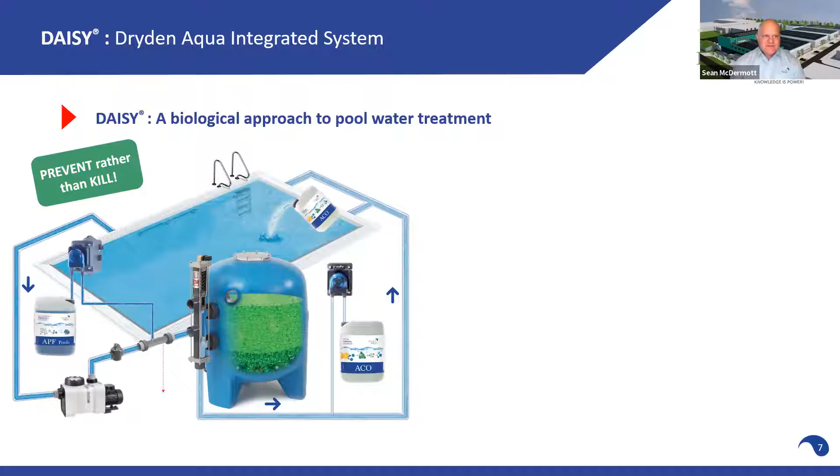And Sean is going to take us through this. I think I have to drive the presentation, right, Sean? Sure, no problem at all. So yeah, Daisy, Dryden Aqua Integrated System.

This differs a lot from the normal course of action in the US, which is to use large amounts of chemicals in the water to try to annihilate any pathogens that are brought in. What we want to do is prevent their ability to propagate, to grow in the pool, in a way that produces the least amount of harmful disinfectant byproducts.

So step one, of course, with Daisy is our filter media, activated filter media, AFM. It improves the filtration, of course, but it also eliminates the breeding ground on which bacteria and pathogens can grow and multiply. That's biofilm. We eliminate biofilm growth in the filter.

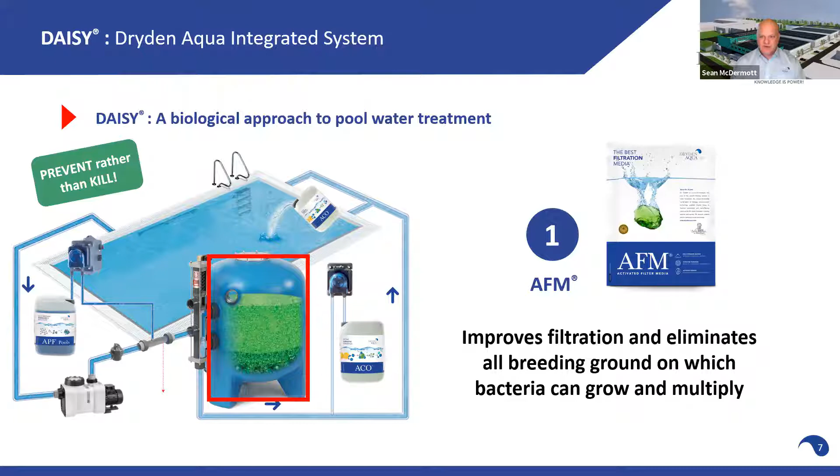Step two is APF, which is a multi-spectrum coagulant and flocculant. It's the only one in the industry. And what this allows us to do is to pull things out of the water, out of solution or suspension, that filtration normally won't be able to pull out. Beyond that, we're also removing all of the nutrients that bacteria and algae need to grow in the pool. So it's 5 different active ingredients, and it's a multi-step process.

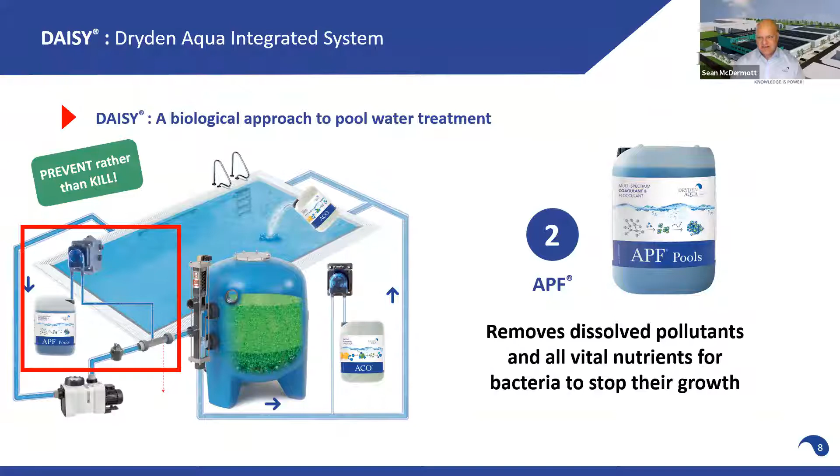And finally, for outdoor pools and pools with UV systems, we have ACO, which protects chlorine from the sun, but not like cyanuric acid does. This is a replacement for cyanuric acid. So the first step is we protect the chlorine from UV light. The second step is that reaction is a catalyst for producing additional oxidants in the water.

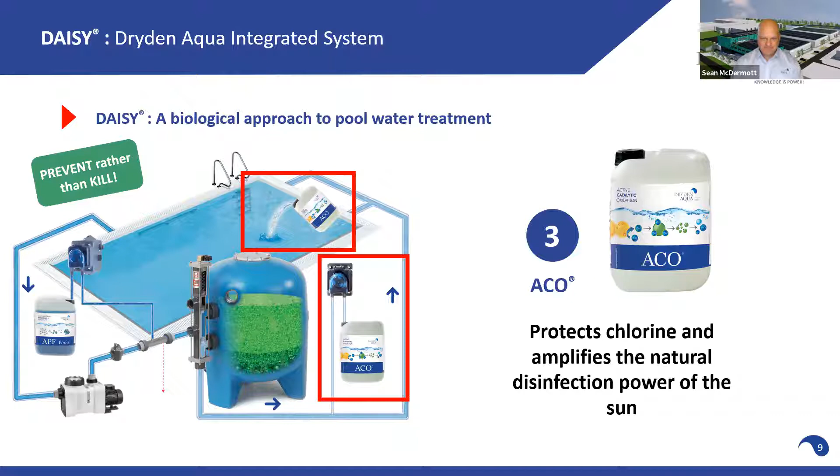Summary: this can be used with all types of pool water treatment, and the results are the absolute best filtration available in the industry, possibly down to 0.1 microns when you use proper filters and flow rates. Oxidation demand is therefore reduced by up to 80%.

Your chlorine is going to have a much easier job of disinfecting the pool. If we're using less chlorine, of course, we're going to produce less of the toxic disinfection byproducts that chlorine produces, such as trichloramines and trihalomethanes like chloroform.

And to summarize what we stand for as a company: the safest and clearest water possible, the best air quality for indoor pools, and the lowest possible chemical consumption and operating costs. So you spend a little bit more upfront on the Daisy system and properly sized filters, and in the long run, you save yourself a lot of time, money, and headache.

Well done. Good. Very good. Thank you, Sean.

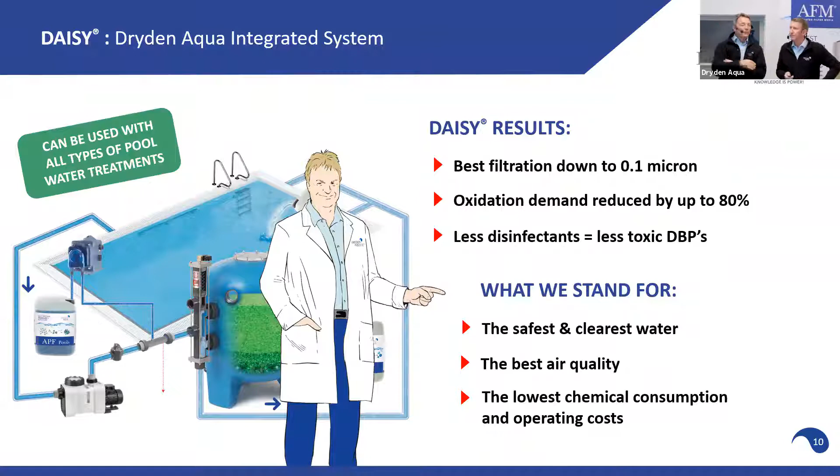I don't know about the US, but you see it very often in Africa, you see it in Asia: very small filters. But then in the pool, to compensate for it, high levels of chlorine, 3 ppm, 5 ppm, where we can run our system with 0.2 ppm. So we don't want this situation, we want to have a different one. And part of the reason why we see this is because of this here.

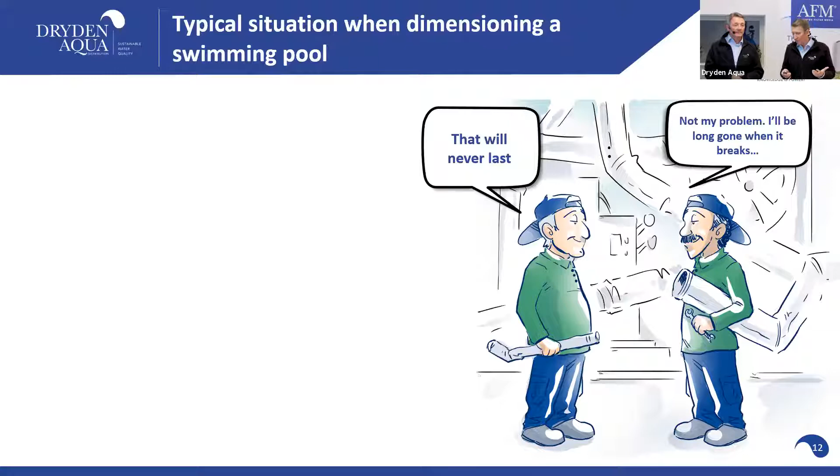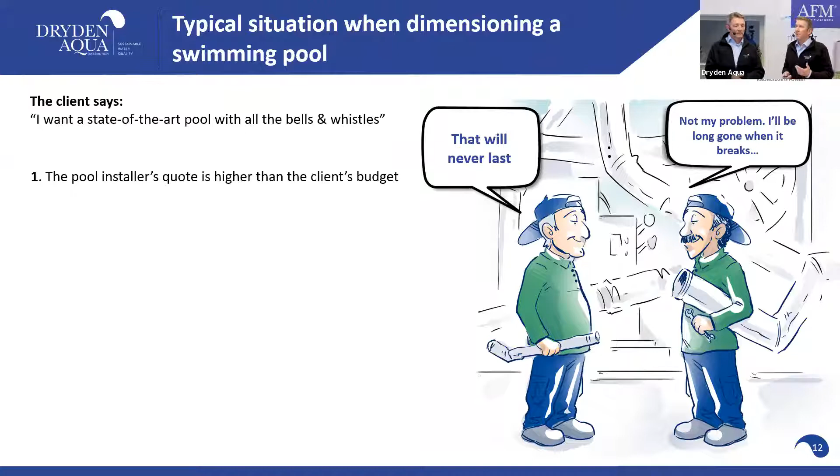A pool owner wants a state-of-the-art pool with all the bells and whistles. The pool builder makes a quote. The client comes back and says this is way over budget, and asks for savings. So what does the installer do? He compromises and cuts corners: he reduces pipe size, reduces filter sizes, buys cheaper pumps, and doesn't use AFM but a cheaper media instead.

This is not sustainable, and it leads to a number of problems. One is the performance of the pool is not satisfactory. Your water and air quality is not what the customer is expecting - it's bad. And ultimately, there are a lot of costs that develop to fix things later in the process.

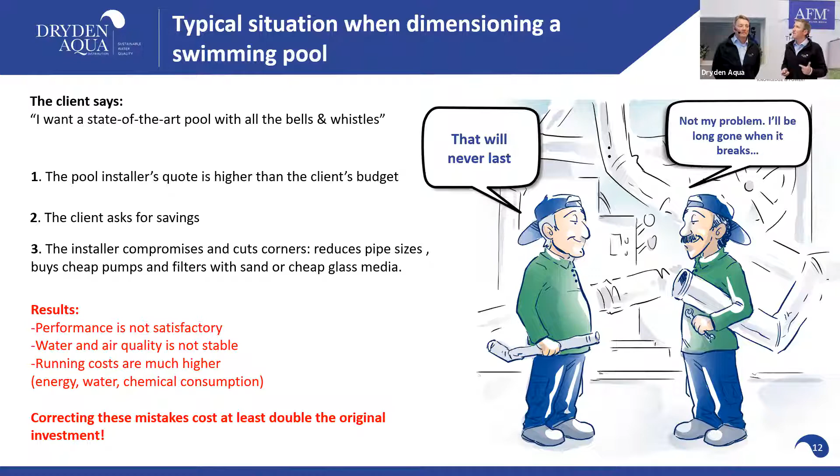Also the running costs are higher because you need more chlorine, etc. And to fix it, very often it's impossible, especially the hydraulics. So we want to give you good arguments so that at that point you can tell the customer: listen, I would invest $200 more here, get this filter a little bigger, and you'll get this effect - it's worth investing. Not everybody will follow, but if you bring good arguments, people will understand.

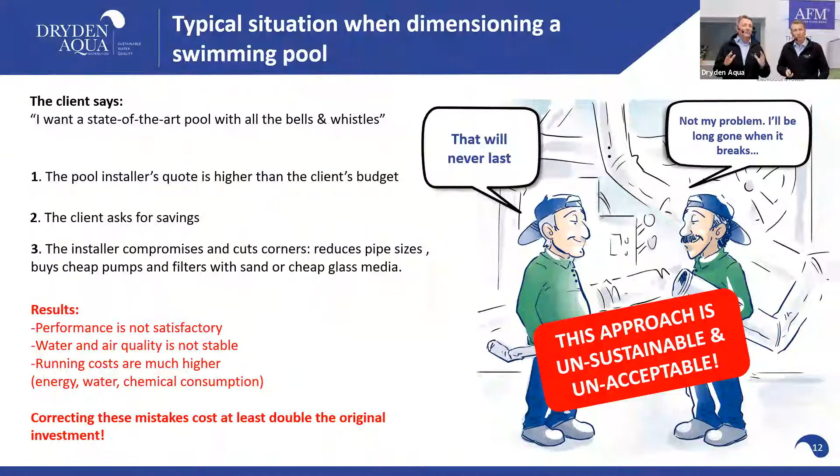They will take you seriously. They will take you as a pool expert. And that's what we are doing. So when we talk about pool water treatment, there are really four steps that we need to consider.

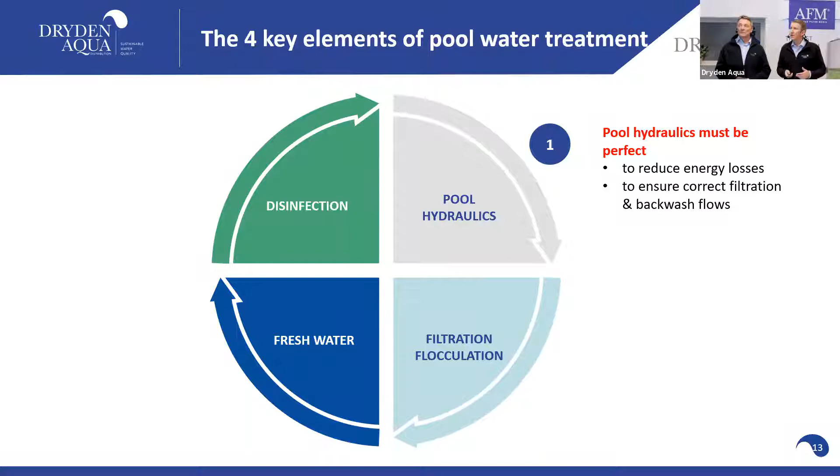The first one is pool hydraulics, because with properly dimensioned pool hydraulics, we will reduce energy losses and ensure proper filtration and proper backwash. It's also very important that we mix the water well and avoid dead zones. In this session we'll go into detail on how to achieve good mixing, and what you can do to improve it if you don't have good mixing.

Then the second step is about filtration and flocculation - that's our heart. The more organics you can remove from a system, the less oxidation demand the water has. If you use less chemicals, less chlorine, less oxidants, then subsequently you have less toxic and harmful disinfection byproducts. It's quite a logical relation - if chlorine consumption goes down, disinfection products go down.

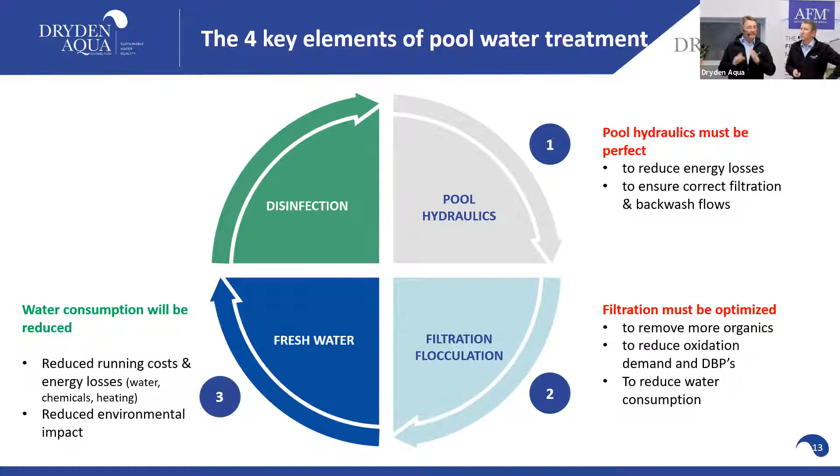If you do a very good filtration, you can also sometimes save a bit of fresh water, with shorter or less frequent backwash cycles. That's not our main focus, but very often we can do some savings there too. We'll definitely have savings on chemicals and oxidation - if we reduce oxidation demand by 50% or even 80%, using 80% less chlorine, in big public pools for example, instead of using 20 IBCs, only 10 IBCs - that makes a difference in dollars, but also for the environment, in transport and production.

The first point is to reduce operating costs and environmental impact. But the main point is optimal bather comfort and safety - really to minimize disinfection byproducts. Actually, what we are doing with the dolphins, we want to do with your customers: keep them safe and healthy.

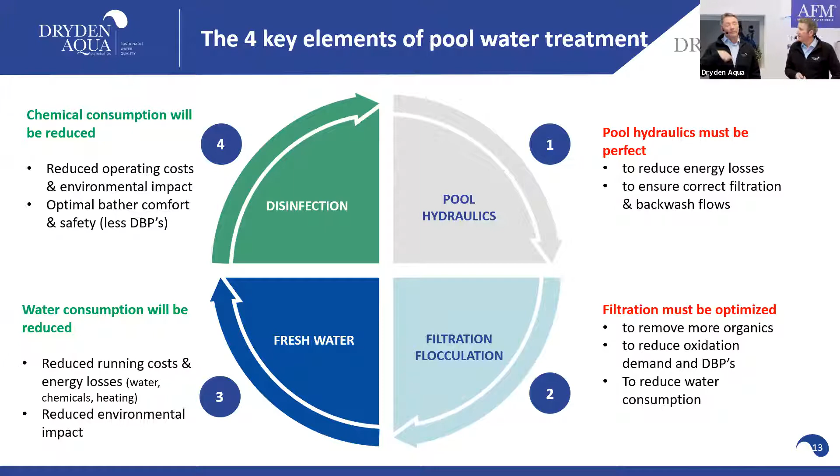Session number 4 will be about biology in filters and disinfection byproducts, so we will talk in detail. These topics are a little bit interlinked, and it's best if you follow all of them.

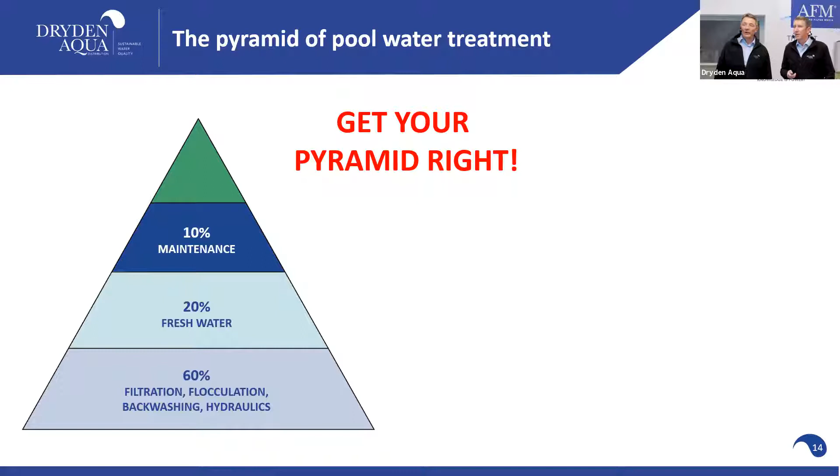So the summary of this is: get the pyramid right. To get the pyramid right, the focus needs to be on filtration, flocculation, proper hydraulics, and proper backwashing. This is the foundation, a good base, and then all the rest will come automatically in a way. This is why we want filtration and hydraulics first, to make a proper stable base.

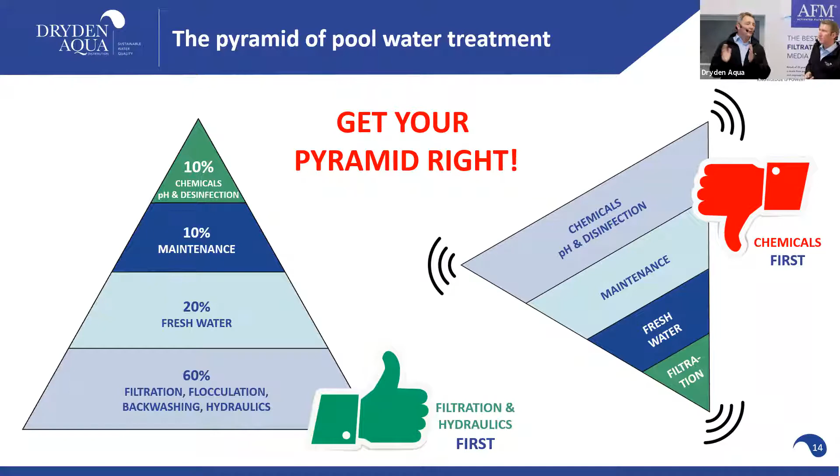Next topic we want to bring up here is turnover rates in public and private pools. Sean, you want to say a few words about this?

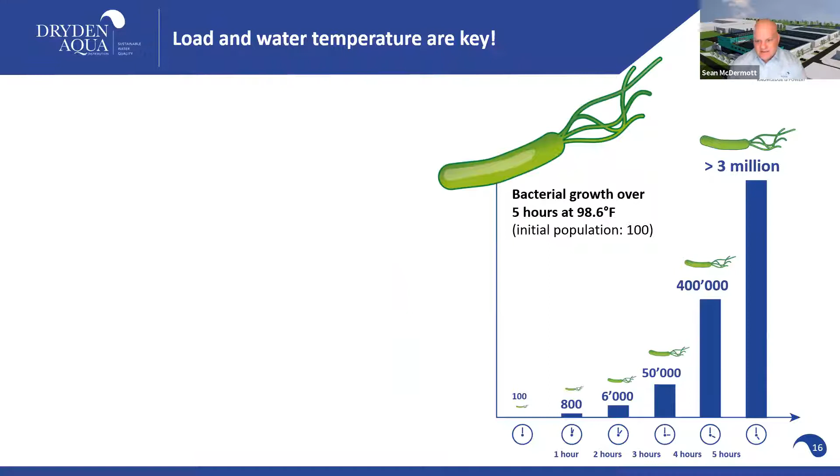Absolutely. So load and water temperature are key for designing a pool with a proper turnover rate. Bacterial growth occurs very rapidly the higher the load, and especially the higher the temperature of the water. So if we have a small pool or a hot tub, we have to increase the circulation in order to turn over that water more often, remove bacteria, pathogens, contaminants and debris with the filtration to compensate for the load. Likewise, the warmer the temperature, the higher the circulation rate must be.

And we see this in the Model Aquatic Health Code. For hot tubs, the hotter it is and the more bodies that are in the water, the more we have to turn over that water to keep it safe.

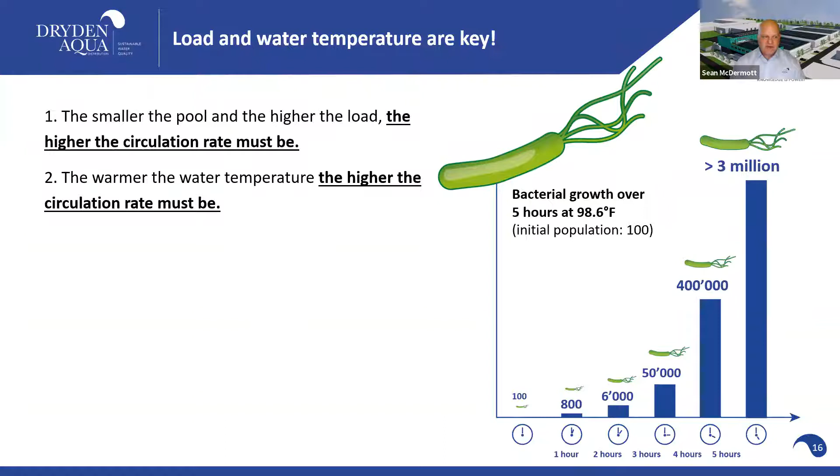So Dominic, you brought a good example today. If you have 5 people jumping in a pool with 10,000 gallons, or the same 5 people jumping in a pool with 100,000 gallons, the load on the water is 10 times less. That's exactly what it is. This is why, as Sean says, size of the pool and bather load have a big impact. In addition to that, water temperature as well.

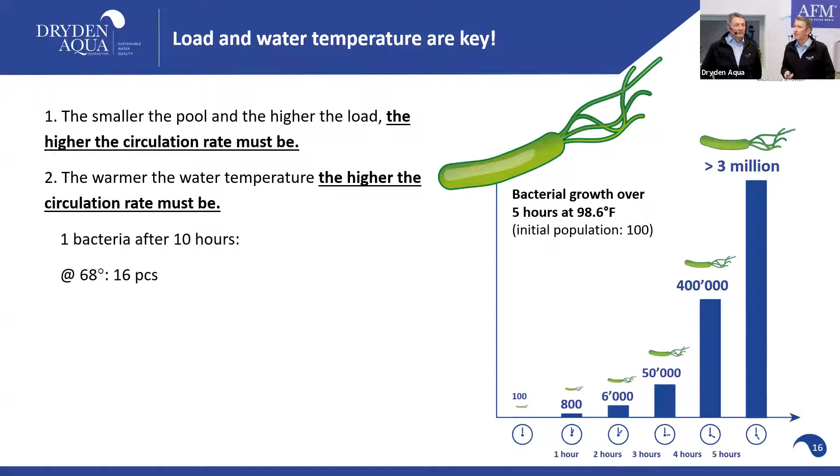Anything you want to say about bacterial growth? Sure. This is a good example of how temperature affects bacterial growth. At 68 degrees, after 10 hours, we'll have 16 individual bacterium. When you go to 77 degrees, the same 10 hours, we're producing 256. And at 86 degrees, that number is 500,000. So temperature makes a huge difference.

And, of course, moving water is going to have less biological growth. Because of the flow, circulation and turbulence, bacteria have a much harder time growing, mainly because they're not able to attach to a surface very easily and grow the biofilm needed for rapid biological growth. So filtration is always recommended in public and private pools. We can turn the water over as much as we want, but if we're not pulling the debris and pathogens out of the water, circulation is only maybe 10% of the equation.

Let me add one thing, and I'll do it in Fahrenheit. In this example, at 86 Fahrenheit, the doubling rate of heterotrophic bacteria, if there is enough food, is 30 minutes. If you go up to 98 Fahrenheit, it's only 15 minutes. So if you increase the temperature by 10 Fahrenheit, you halve the doubling rate. And the same goes if you go down. At 68 Fahrenheit, the doubling time is every 2 hours. You see what a big impact this makes.

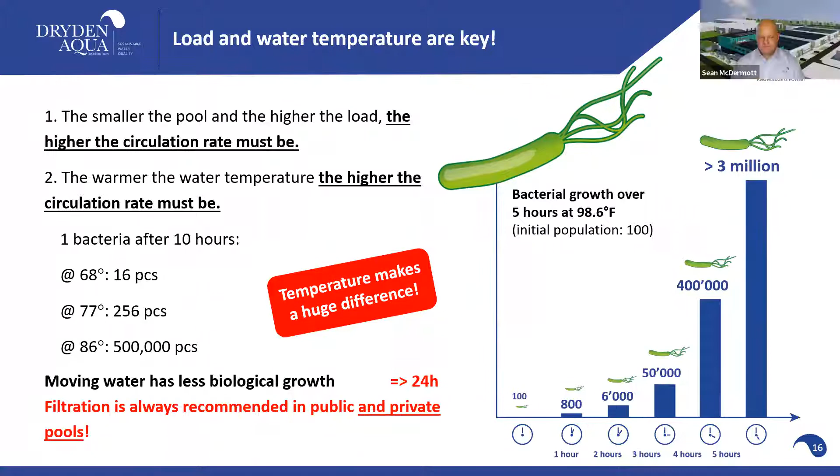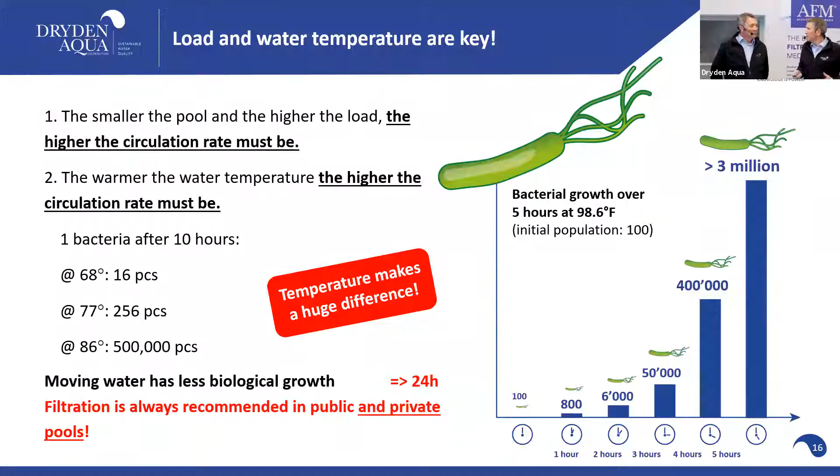And that also explains, if you have really cold water, like 5 degrees Celsius, maybe 40-42 Fahrenheit, at that temperature the bacterial growth is nearly zero. Then you don't need any disinfection, because it's too cold for them. That's why you don't need much chlorine in the winter when your pool's closed anyway. Actually, you don't need any, just a little bit of circulation. Okay, that was: moving water is safe water.

So another interesting topic is filtration and what happens when you stop filtration. Obviously you're not moving water, you're not filtering the water anymore, but something biological takes place as well. The heterotrophic bacteria that we've collected in the pool will eat the food and consume oxygen. Eventually, there won't be any oxygen left, and the bed becomes anaerobic.

And at that point, if you stop the filter, whether that's through stopping circulation or completely cutting the filter off, these heterotrophic bacteria are going to deplete the oxygen in the system.

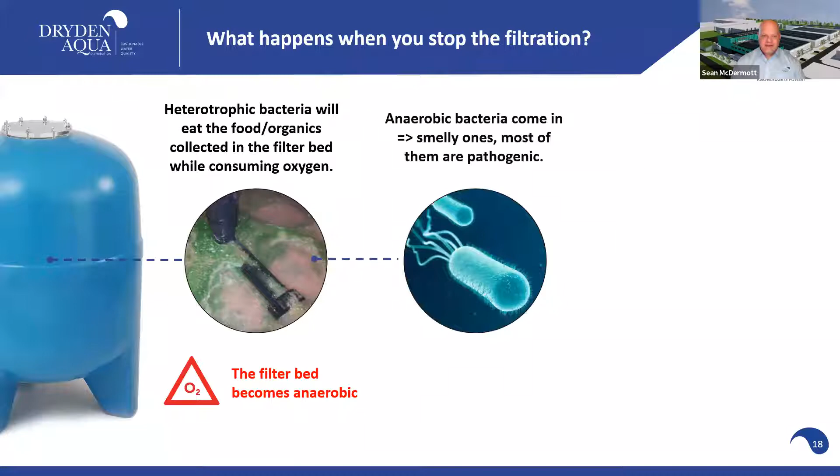At that point, the nasty stuff comes in, anaerobic bacteria. This is smelly bacteria, most of it's pathogenic. It's not something you want in your pool filter.

In commercial pools, most of the time we're running 24 hours a day anyway. But a lot of times in residential pools in the US that are stuck with 1-speed pumps, they're going to run 6, 8, 12 hours a day and shut them off. This is highly detrimental to the system overall and really unsafe in the long run.

So what we can do is use a 2-speed or even better a variable speed pump, run it 24 hours a day on a lower speed and eliminate that possibility of anaerobic bacteria taking hold in the filter and the plumbing. Let me stress this once again so you fully understand.

It has nothing to do with AFM, even with a sand filter. It would be good if you're in 24 hour filtration. And if you say, Dominic, I don't have the budget for this, the cost of electricity - even if you run your filter at very low numbers, like 1 cubic meter per hour, a tenth of what you usually would do, you never get anaerobic. Your power consumption is 0 or near to 0, but you never get anaerobic. And it's good if you never get anaerobic.

So learning number 1 for today: try to stay really in 24 hour filtration. Never stop the filter. If you stop it for half an hour, nothing happens, but not for 10 hours - that's not good. And especially in public pools, they should definitely be in 24 hour mode.

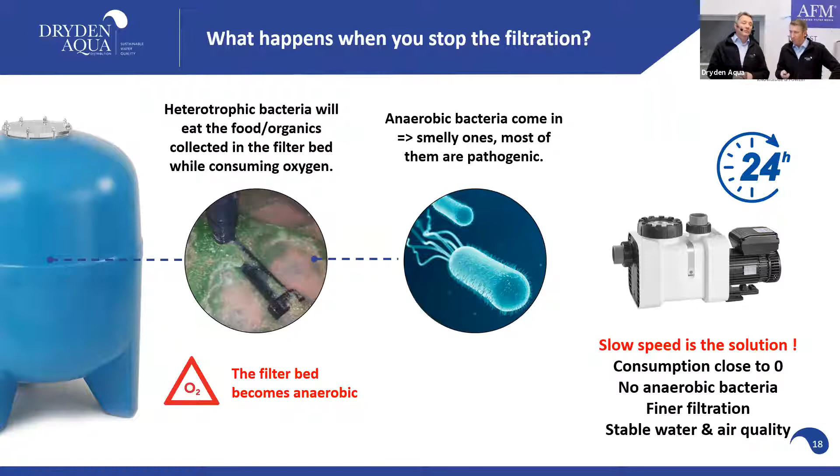I think if you cut your filtration velocity in half, you're saving 75% of your energy, right? Absolutely. That's because the resistance in the system goes down by a factor of 4, and this is why your consumption comes down. And if you cut it again by half, then it's another 75%. So that's what I mean - even with 50 watts, you still turn some water and you never get anaerobic.

If we're running a very warm pool, we want more turnover. If the pool's cooler or not being used, we can run slightly longer turnover rates. But we want to see 3 to 4 cycles per day minimum.

Some suggestions for a small 15,000 gallon pool: a 4-hour turnover rate for 8 hours is going to give us 2 turnovers in that time period. Then at night we can slow that down a little bit to an 8-hour turnover rate during 16 hours. So for 8 hours we run it on a higher speed, get 2 cycles, and then lower that speed down for the evening, achieving 2 more cycles.

That's 4 turnovers in the day. But even more important than that are some examples of filtration velocity. 12 gallons per minute per square foot for the 4-hour turnover rate. We're able to decrease the velocity but increase filtration performance to 6 to 8 gallons per minute per square foot of filtration area. That recovery period is going to work wonders for the pool from a clarity standpoint, but also from a chemical consumption standpoint, because we're able to filter out more pathogens.

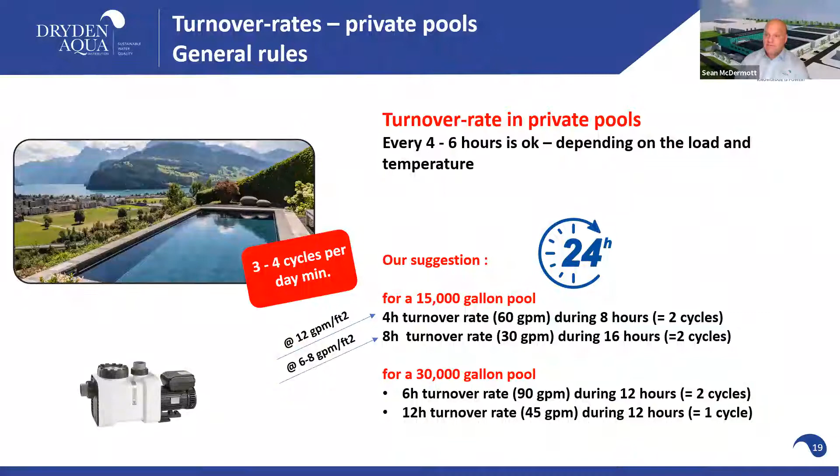For a larger pool - and the filtration velocity, you decide with what size of filters you use. This is in session number 2. Today we just say, what should be your pump, what should be your turnover rate, and that's our recommendation. If you say, well, 12 gallons per minute per square foot is too low for me, then you take 18 and reduce it down to 9 during nighttime.

You still have this. By the way, can I quickly add - in this example, here you would have probably 600 watts of power consumption, but here you will have 150 watts. So you see how much that drops.

Also, one thing worth adding: if you have these 4-hour turnover rates, that doesn't mean every drop of water in your pool has seen your filter to take the solids out and be disinfected.

It's only about 60%, and this depends very much on your hydraulic system. It will take 4 times longer, up to 16 hours, until each and every gallon has seen your filter.

Maybe one word here about filtration velocity. You see here 12 gallons per minute per square foot. Filtration velocity is always water volume over filtration area. This is, by the way, equivalent to 30 meters per hour. This is what we recommend at Dryden Aqua.

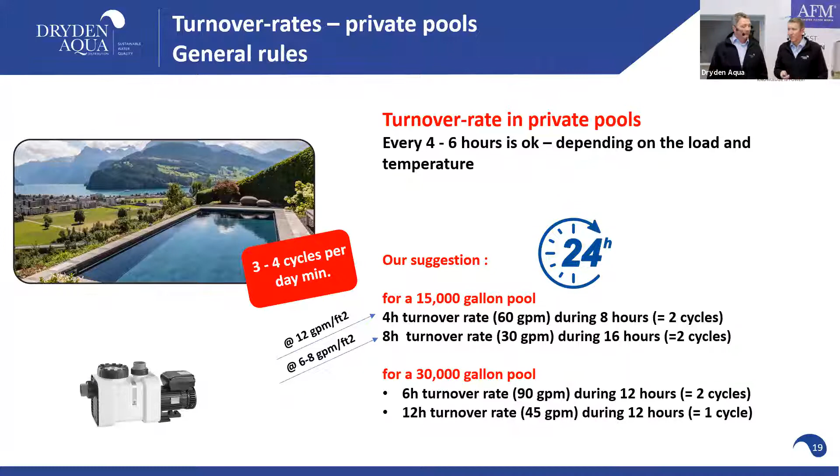Honestly, to filter at say 20 inches compared to 30 inches, we're not talking thousands and thousands of dollars, we're talking a small amount of money, a small cost difference. But we'll talk about this more in detail.

Then, of course, John, when it comes to commercial pools, you're a bit closer to the rules and regulations. Obviously we have codes we need to follow. You put this together to show us the MAHC, the Model Aquatic Health Code. This is right out of the Model Aquatic Health Code showing different types of pools and the turnover rates they recommend.

For example, an interactive water play area, an activity pool, or a wading pool - these are pools with low volumes of water. They're very shallow, or even splash pads. They need very high turnover rates because the bather load to gallons of water ratio is extremely high. So half an hour or less for an interactive water play.

The MAHC recommends for all other pools, like a lap pool or competition pool, 6 hours or less. We recommend 4 hours or less. The more, the better.

Obviously, we don't want to start ramming a bunch of water through our filters and decrease filtration performance too much. But if we have the opportunity to design a pool, we want to see 4-hour turnover rates in all pools, maximum 4-hour turnovers.

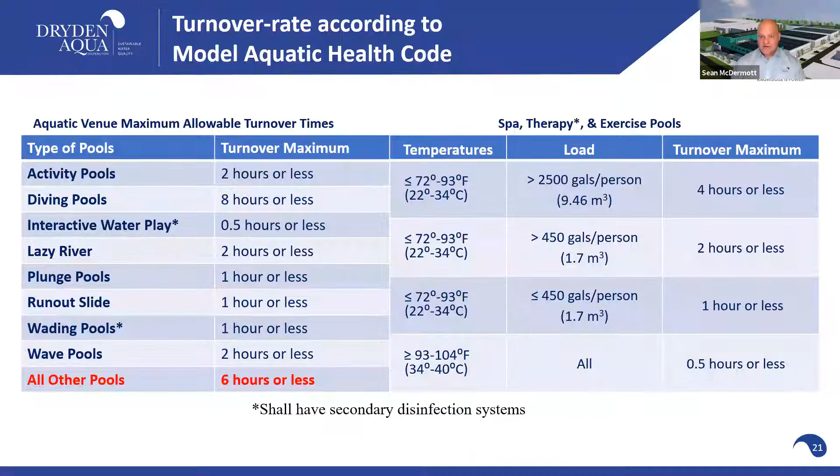I think these numbers make a lot of sense, they're quite close. Just the red one, 'all other pools,' is near 4 hours. But this one is interesting here for spas - for very hot water, in Europe or the German DIN standard, it's 4.5 minutes, let's say 5 minutes. And here it's 30 minutes.

So this is a big difference. There's a big difference, I think this one is a little bit high. But other than that, I think 5 minutes is a little bit too aggressive in the German DIN, but anything like 10 or 15 minutes, I would not go higher than this.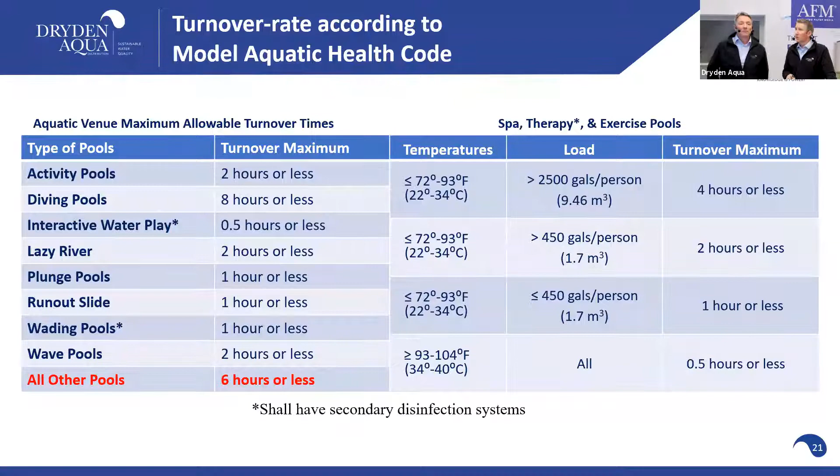Okay, excellent. So the next topic, now that we've talked about turnover rates and calculating your filtration and backwash volumes, the next logical step is to talk about pumps and how to select the right pump.

We have a little example here to take you through that shows the dynamic head of an overflow pool. We have these 3 heads basically that you'll find in a system like this. The first one is the geostatic head, or the elevation head. In this example, this is approximately 10 feet, which is equivalent to about 5 PSI. Then you see the balance tank here.

For this overflow pool, we are sucking water with the pump here from the balance tank. This is an average number of 2 psi that we're calculating with.

We now run the water through the filter. We have a pressure head in the filter that we need to overcome, as well as in the pipeline. So we calculate in this example 7 psi. Now the water goes back into the pool.

On the way to the pool, it may have to go through a loop, a bypass, a UV or a heater or whatever, so we're going to lose more friction head here. And then last but not least, we're losing head in the jets, right? The jets, based on how they are dimensioned, will lead to some pressure loss. So in total, for this example, we are looking at about 22 psi of dynamic head, which is an equivalent of about 50 feet of head.

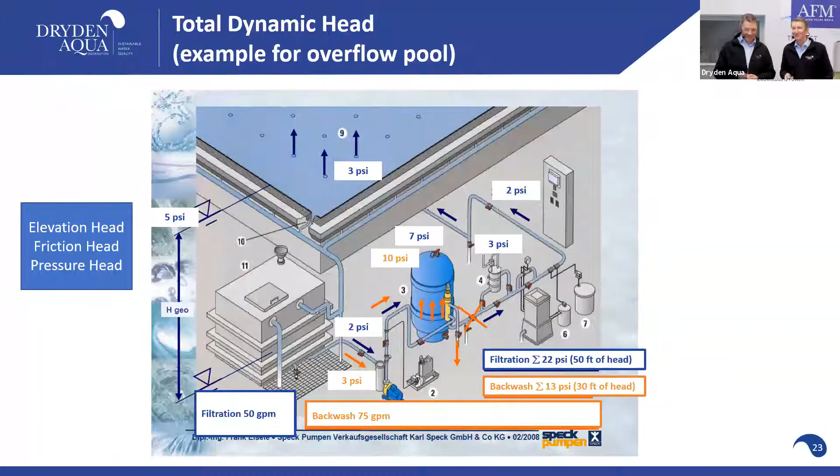I passed. Okay, so now we move on to the pump curves. Based on what we just found out, we have a flow of 50 gallons per minute. We have a head loss of 22 psi, or 50 feet of head.

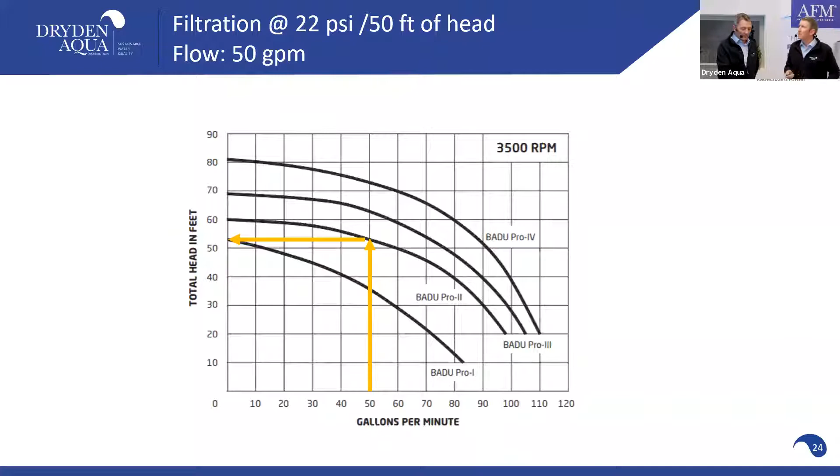We take a pump curve. We go to the gallons that we need for the flow. We find this pump curve here. This is a pump curve for a product called Speck, a single speed pump. This will give us, or this can overcome, a head of roughly 50. So good, right? This would be the right pump for the filtration.

Now, if we look at the backwash, on backwash we would need 75 gallons per minute, right? We need a higher velocity to backwash and lift the filter bed. So we have a higher flow, 75 and not 50. And if we use the same pump, this would allow a maximum head loss of 40. In our example, the head loss was only 30, so we're okay. But really, we might have to either throttle it down, or we have a higher backwash velocity—that could be a problem.

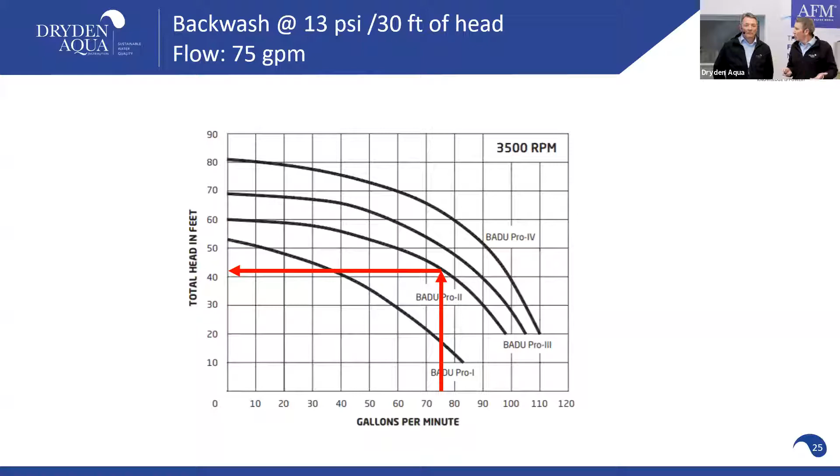The solution, a much better, 21st century solution, is to use a variable speed or frequency controlled pump. Absolutely. This is the picture that you see—this is one pump that can give you all these curves.

Everything in the whole area below this curve represents points that we can go to. You can pick any point in here, and you can program your pump so it will deliver the amount of water that you need at the resistance that you have in the system.

As you said, it's 21st century technology, we should use this. This is a no-brainer from many points. If you have a single speed, you always have the maximum power consumption, and you just have to tame it down, so you're wasting energy and wasting the customer's money. It's better he invests first in a variable speed pump, and then you get to the right point. And of course, together with this, a flow meter is a must, because this is how you can control it.

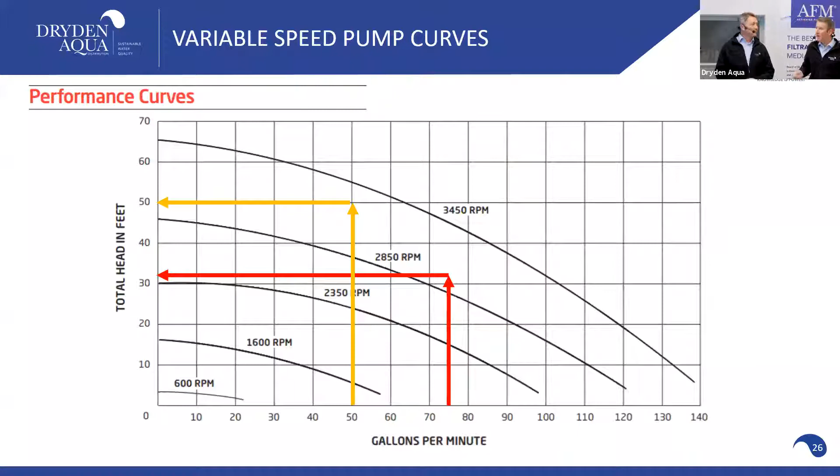Then you're safe, you don't have to calculate. You just look at your flow meter and say, yes, this is the speed I want, and then you're spot on. That's how you do it, and that's in Europe, in America, in Asia, everywhere. It helps save energy, and it comes with all these benefits.

So in summary, if we look at the total heads we're looking at, usually these are rules of thumb that help with the calculation. In public pools, we're usually looking at about 22 psi in filtration for head loss, and about 13 psi in backwash mode, if you follow our recommendations on the velocities in the pipe that we cover in session number 3.

And if we look at private pools, we have skimmer pools and overflow pools. Skimmer pools will be in the area of 15 to 18, backwash 9 to 13, depending on whether your filter is at the same water level or actually below, so it has to overcome the static head we were talking about a couple of minutes ago. And for overflow pools, this is what this picture looks like.

If you use variable speed pumps together with a flow meter, you don't have to make a headache, just take your VSD pump big enough, it's never too big. Then you can always go down to the right point, and if you go down with the velocity, you also have much less noise and less power consumption. This is how you do pools today.

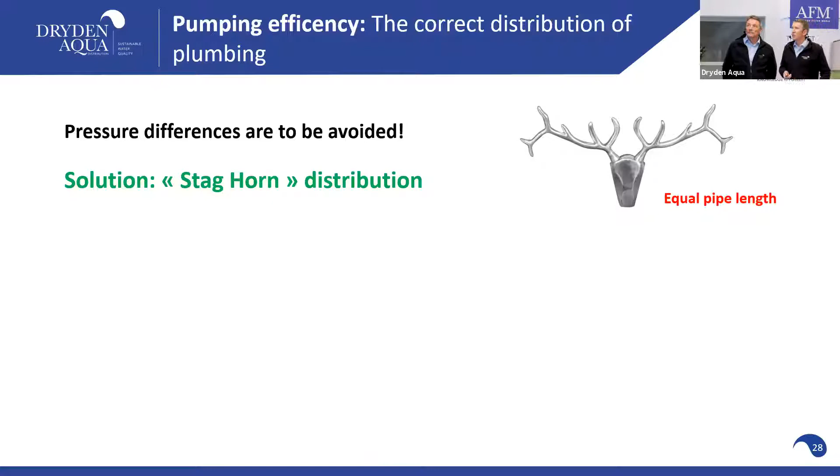Another topic we want to talk about is pumping efficiency and equal distribution, right? This is what we call the Staghorn distribution, to ensure equal pipe length. So this is an example where we have 2 nozzles that we come in here with 2 pipes that have the same length, so the pressure distribution is equal.

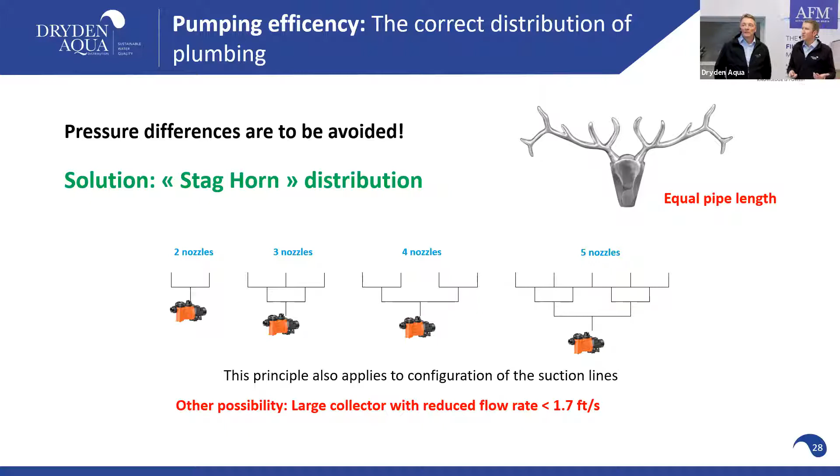This is how we would design it with 3 nozzles, 4 and 5, and so on. This can be used on the suction side or the pressure side, there's really no difference. Another option is to use a large collector. Here we would go for the next one, then you can explain it better.

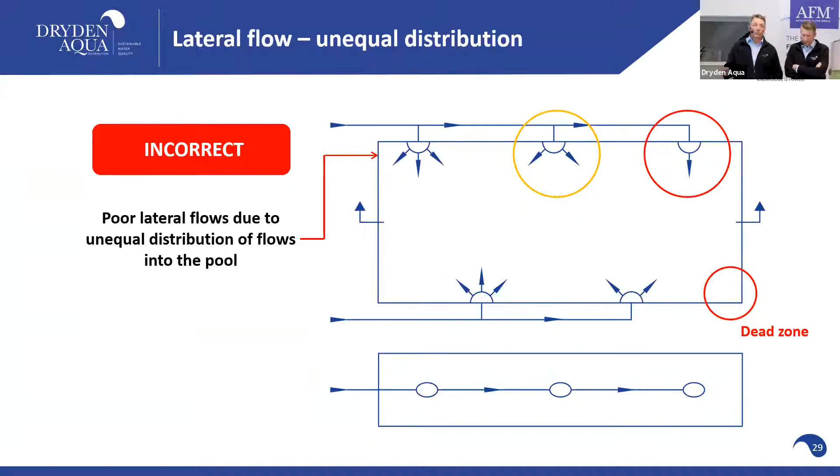What you could also do is oversize this, meaning instead of 1.5 inch, you do 3 inch. Then you have a very low velocity, and also an equal distribution. We call this a collector, and I think it's the same in the US. So these are the two things - what we do not want here are the dead zones, and this is why you really have to make sure you have an equal distribution. The next slide shows how it is done correctly.

Here we have the Staghorn distribution, allowing an equal flow. Also on the opposite side, we have a Staghorn approach, and also for the collector down here.

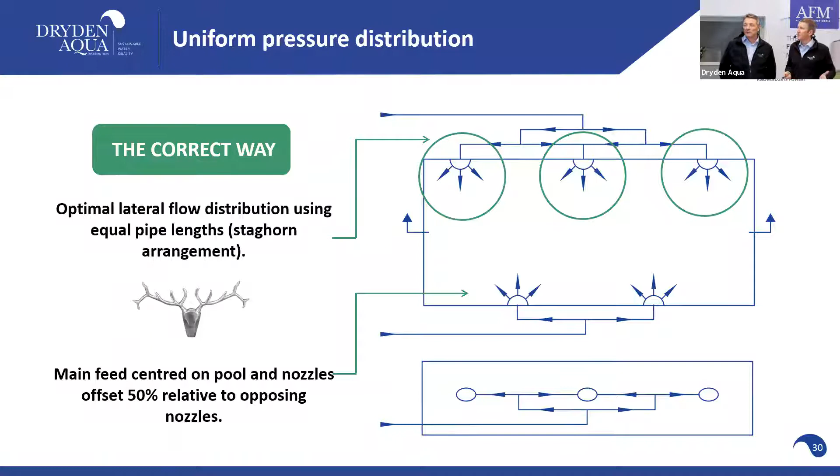Very simple, straightforward, but this is how you get your pressure distribution right. So here's a good overview for skimmer pools.

If you look at some of the sizes here, they come from the metric conversion, but you will recognize some of these sizes. One pool, for example, we want to look at the volume. That's more important even. These are very common: 15,000 gallon, 30,000 gallon. These are two residential pool sizes that are quite common.

If we look at this one here, we would have a filtration of 53 gallons per minute. So here we took not 4 hours and not 6 hours, we took the medium, 5 hours. And we filter at our recommended filtration velocity of 8 gallons per minute per square foot of media. So if we divide it by 7, you will get your 8 roughly. So in order to pump this much water through your filter at 8 gallons, you will need a filter of that size, 7 square feet.

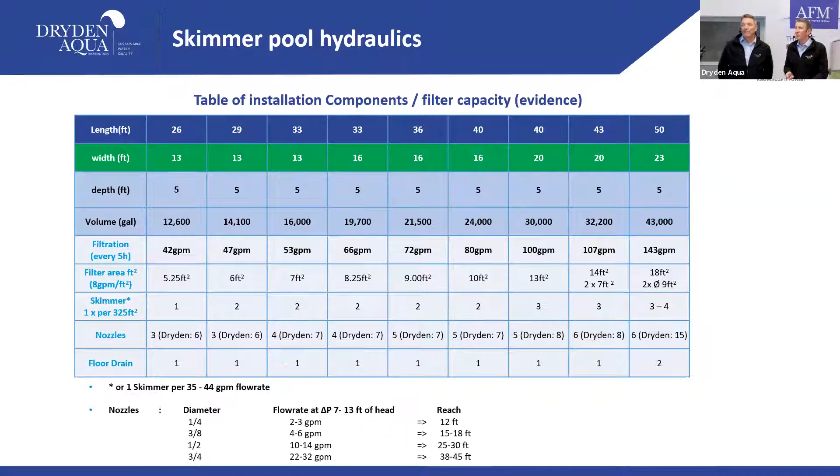No, that's wrong. In Germany, they use sometimes only 4. We in Dryden, or also here in Switzerland, we would go for 7. And 1 floor drain. Why would we go for 7? To have a better mixing.

Can we see it here? Yeah, I think we can see it here. You know what they usually would do now in Germany, and I understand also here in Switzerland, they make it very simple. They have 2 inlets on a high level, maybe 10 centimeters below the water surface, where they just push the water over to the skimmer.

So the skimmer we would have here, usually in the direction where the wind goes, also where we have the pool cover. I don't know if pool covers are something you use a lot in America. Here we have it in nearly every pool. So if you unroll the cover, you end up here with the dirt, and the dirt just jumps into the skimmer. So usually they do this here, they have 2 inlets, maybe 1 in the cover niche, and that's it.

In Dryden, we recommend adding some more inlets, mainly a little bit higher, just 20 centimeters above the bottom, to create a water roll like this, and then to create a skimming action to the skimmer.

So you would have in your example 2 skimmers. You move the surface of the water towards the skimmer, and then below you use jets to roll the water. But listen, you talk with 10 people about hydraulics, you get 10 solutions. The good thing is you have to mix the water, you have to avoid dead zones.

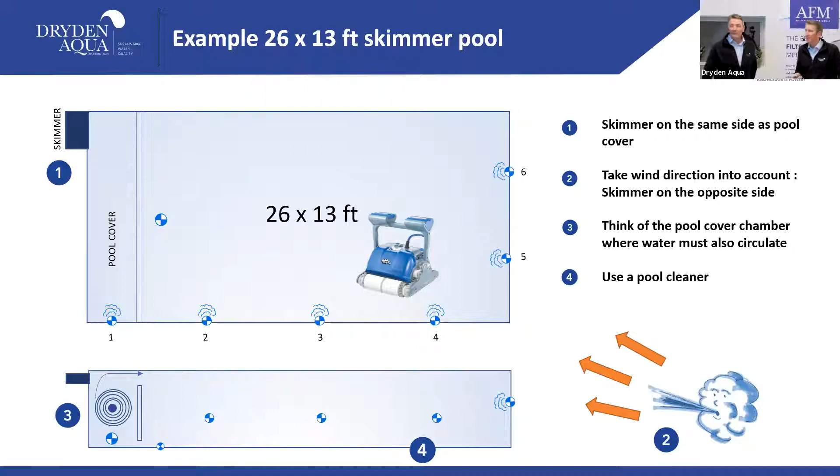This is the last slide about this topic here, and this is really to show you how to dimension bottom nozzles.

On average, we recommend 1 nozzle per 60 to 80 square feet, depending on the water depth we have. This allows an equal distribution, a good flow. You want to cover all the surface, and that's why the deeper the pool, the less inlets you need, and the more shallow the pool, the more inlets you need, so that you cover the full surface and that surface can overflow into your overflow pool.

Overflow pools, first of all, look much nicer than skimmer pools. In a skimmer pool, you swim like this; in an overflow pool, you're on the top. That's why I think it's also called a top level pool or whatever.

But also from a hydraulic point of view, in skimmers you have 2 or 3 skimmers where you suck the water in at about 1 foot. If you have an overflow pool, you skim all around your pool. So that makes a difference, if your customer can afford an overflow pool.

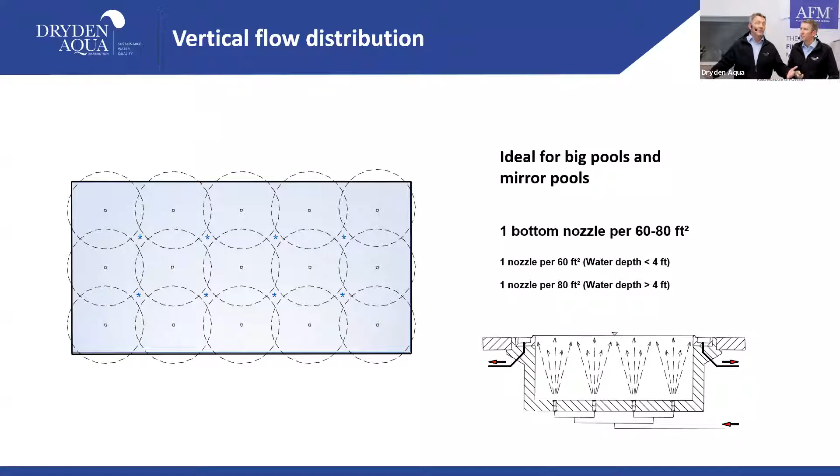Question: would you want to sit in an airplane knowing that your pilot flies blind, without instruments? I think the answer is no, right? Well, most of us don't fly that often anymore, but that's another subject. At least we are not, but anyway, I'm missing it.

I think you understand now, after this presentation, the importance of a flow meter, whether it's a Flowvis or not, that's a different question. This is the best flow meter that we know and also distribute, and it's very important to properly use it. Why is it important?

It gives us security on our process control. We know the backwash velocities, we know the filtration velocities exactly. This is an example here. If you use variable speed pumps, you can set it accurately, so you have a lower filtration at night, your regular filtration velocity here, and your backwash velocity. You know exactly where you are.

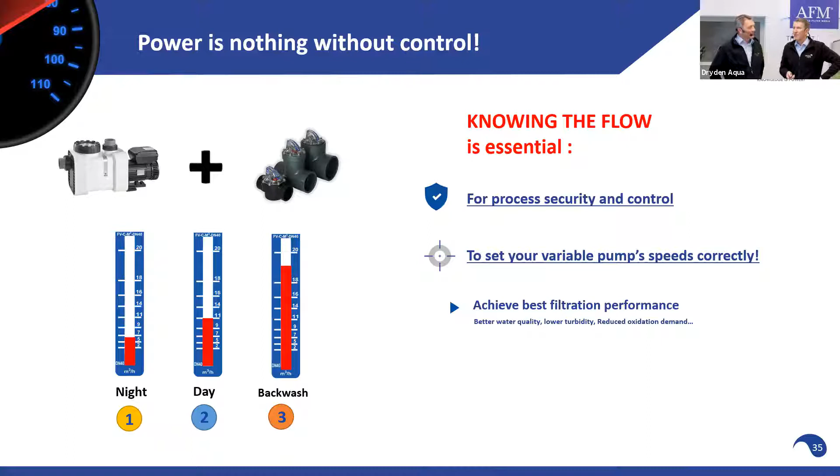You called it the recovery mode, right? Yes, I've heard that term too. This is how you have to do it, especially if you have a variable speed pump. As I mentioned before, this is the 21st century, so it's not acceptable not to use them. I'm a little black and white, but especially if you have them, you need a Flowvis, because that really allows you to go exactly where you want.

If you just go by feeling, I promise you, you will be wrong, you will be wrong, you will be wrong. And you will have a lot of savings because... we have a good example towards the end, that Flowvis example where...

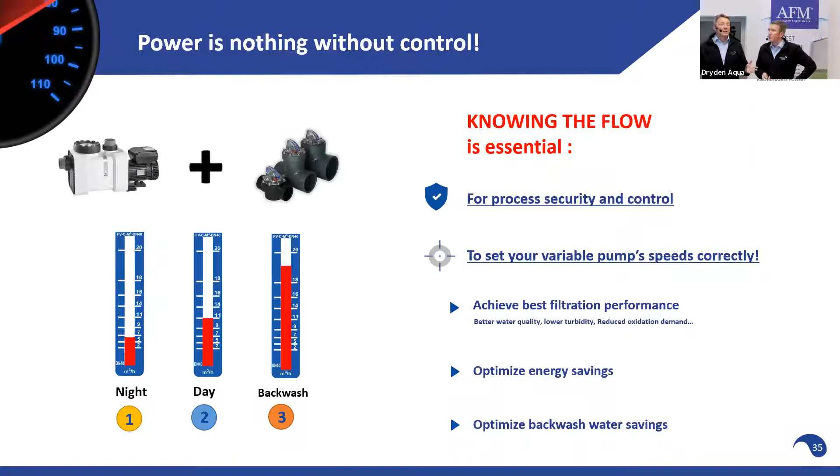I'm talking now about the savings. If I run in the day mode and go into recovery mode, which is half of it, you think, well, instead of 2,400 RPM, I go to 2,000. In reality, you can go down to 1,600, and that's another saving of 200 watts. But these 200 watts multiplied by 10 hours, multiplied by 360 days, that means you pay off the Flowvis in 6 months. That's your payback.

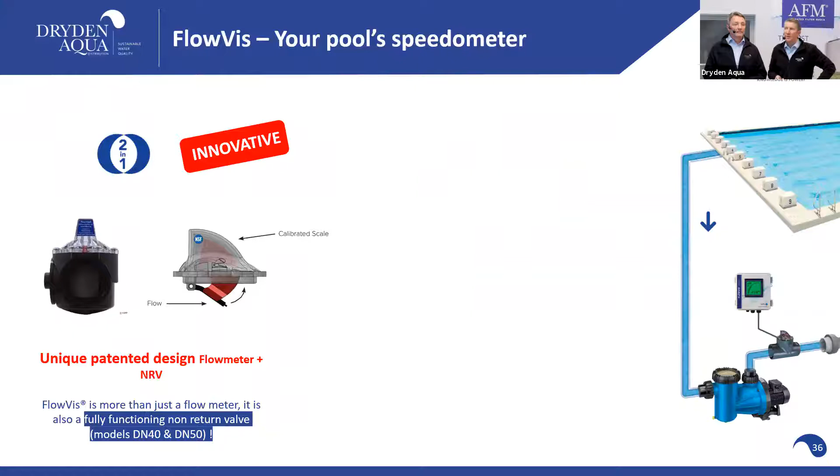So, a couple of important features that are also reasons why we like the Flowvis. One, it's a very innovative product, also functioning as a return, a non-return valve, at least for the 2 smaller diameters, 1.5 and 2 inch. Plus, and I think that's for sure the biggest, the key advantage here, is that it can be installed anywhere.

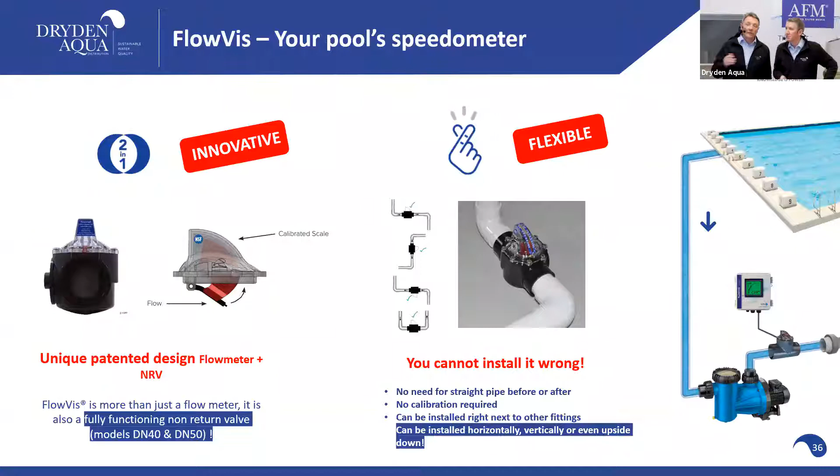It's idiot-proof, you can't do it wrong, and don't ask me why, but I like idiot-proof products. In a normal flow meter, you have to have 10 times the diameter of the pipe on each side in a straight line; if you don't do this, your results will be wrong. Here you don't need that. You install it upside down just after a 90 degree bend, and you have a perfect reading.

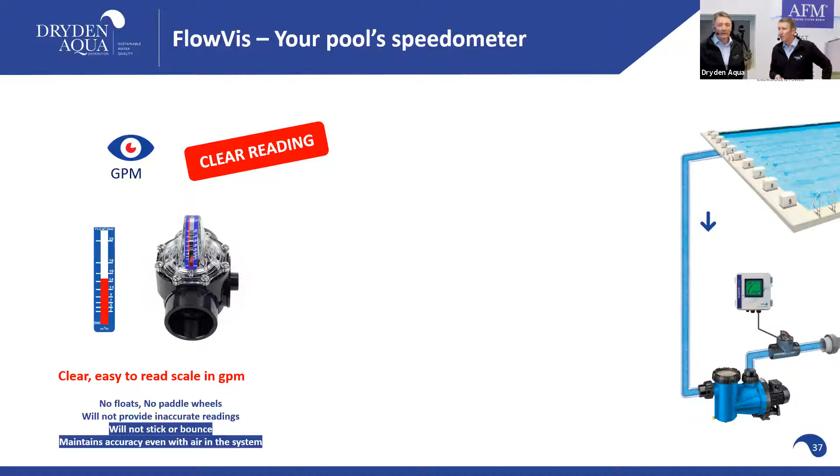In addition, you also have a very clear, very stable reading. No jumping. You have no paddle wheels, no floats, it will not stick and bounce. That's what we've observed now with how many units have we sold since we introduced it? 10,000, 15,000, a good number. And of course, the product is NSF 50 certified.

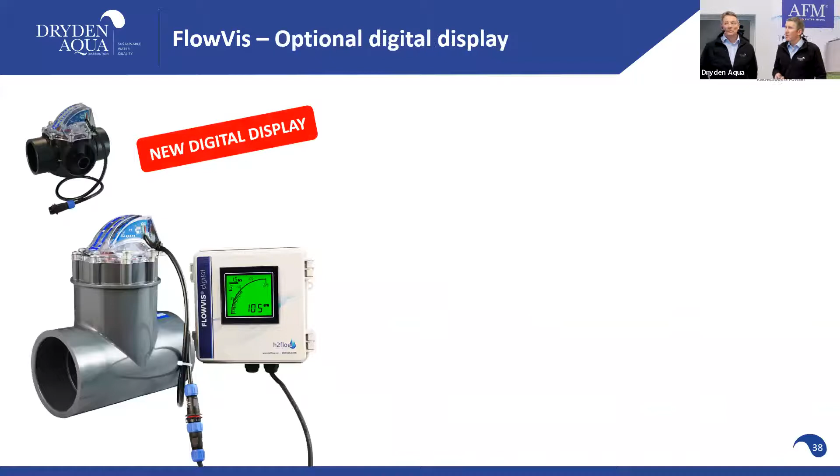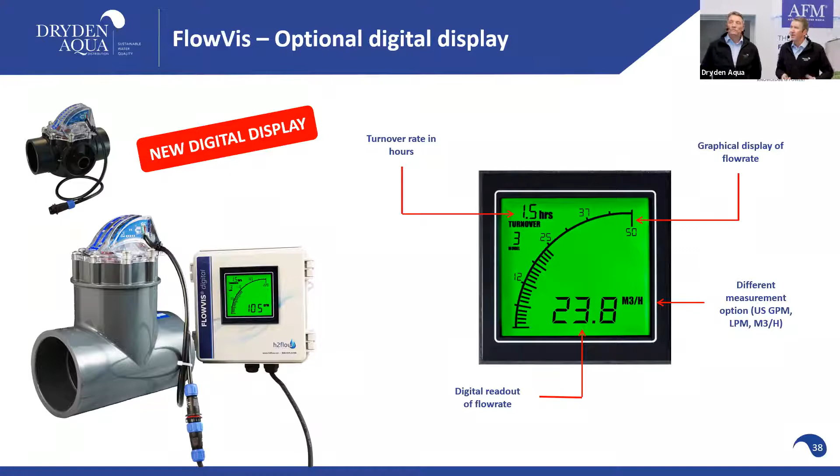We have it also in the US. It is also available for mostly commercial applications. I would guess here together with a digital display that we are just introducing now. It has a number of features here. It shows the turnover rates, the graphical, the flow rates, digital readout. Very well made product. This is what we have available.

Sean, anything to add from your side? No, we were keeping all of the FlowVis valves in stock, or at least immediately available for order in the US. Contact me for pricing. Yeah, exactly. So that's what we agreed. We are the exclusive distributors here in Europe. We are not exclusive in the US, but because we have very high volume, we also get very good pricing. But so honestly, if you buy them from us or not, I don't care.

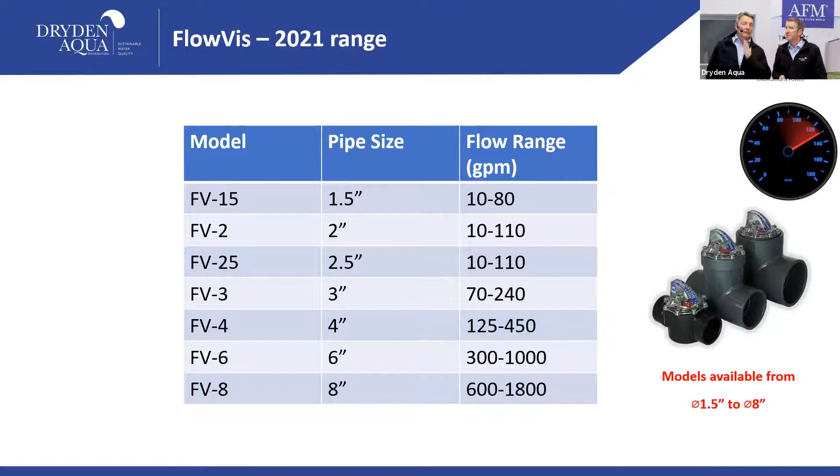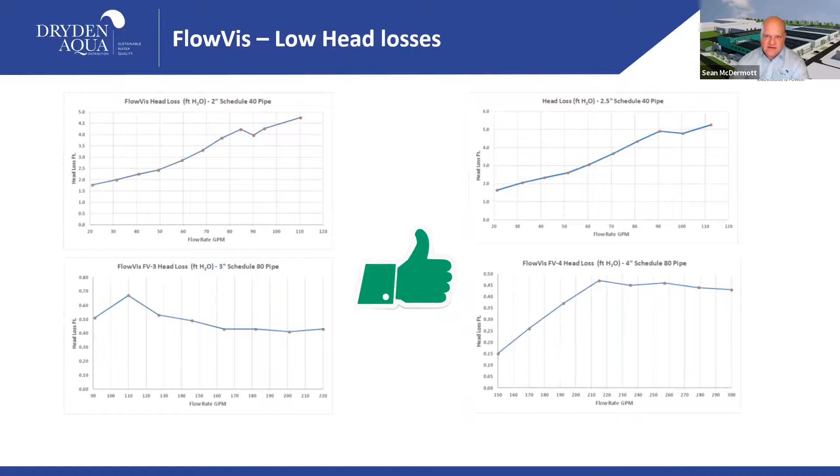But buy them, install them in each and every pool. It gives you and us so much more knowledge, so much more process control. Yeah, especially, you know, we don't see them on residential pools much at all in the US. Not yet. This is why we do this seminar. This is the learning from this lesson. Yeah, they're key, and it's such an inexpensive investment to know what's going on with your pool. Exactly. Yeah, a FlowVis for every pool.

Good. Last point here to mention about FlowVis is very low pressure loss. For the big diameters, we're talking very low head losses. You can see these in these curves here. So a little bit higher for the small ones, but still.

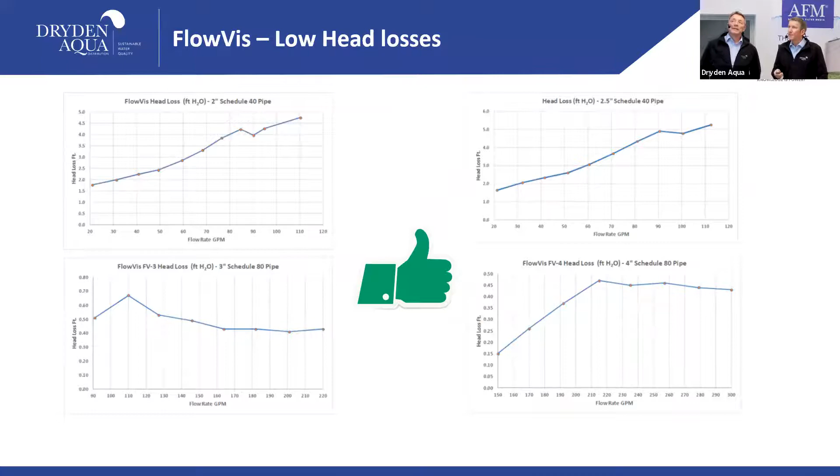Do we have anything to add? Those are your two slides. This was your project. Okay. Well, this was actually the pool that you learned to swim, right? Exactly. Yeah, so this pool is more than 20 years old. Actually, it's more than 60 years old. Here, this is our Manfred. He changed the filtration with new filters, backwash valves, pumps, and FlowVis.

And when he went into commissioning, he called me and said, Dominic, this shitty FlowVis is not working. It's not showing a number. It's always on very low. And I came there and had a look, and he backwashed the filters, and the bed was not moving. So I said, Monty, I think we made a mistake. It's not this. And this is another learning.

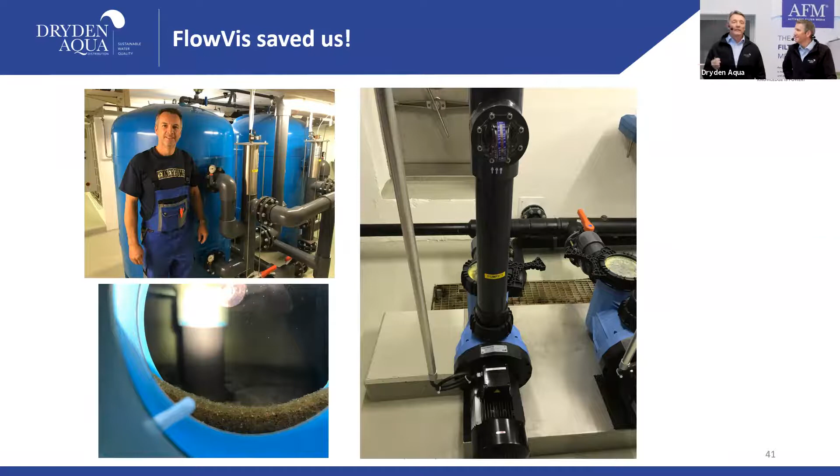You know, FlowVis are the opposite of men. They are not lying. All the women will understand what I mean. They are not lying, they tell the truth. So if you find out there is no flow, it's not that the FlowVis is not working. It's something wrong in your system. And this was here the case.

You know, then we went back. We thought, well, to backwash the filters, I keep this now with cubic meters per hour, don't go into details. You know, we thought we have a resistance here. And that would have allowed us a good backwash with this blue curve pump. But obviously the FlowVis told us no. Instead of getting 50 or 60, we only got to 25. So we went back and had a look on the system and said, okay, yeah, you're right.

We only have 4 aspirations, 2-inch. We have a pump in DN100. We have quite a lot of elbows. So we had more resistance than we planned. We really planned this. And so we changed the pump to the orange curve, and then all worked well.

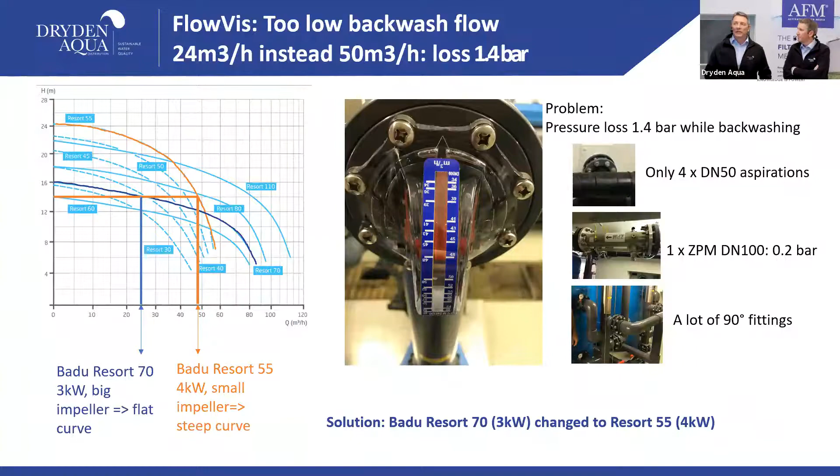These we learned on the commissioning, not 2 weeks later when you start to get problems, or 2 months later where you get really in trouble with pathogens and whatever. You've learned it in the first minute. And this is really the value of this FlowVis. So again, if you have one learning, it is a FlowVis in each pool. Okay, clear message. Yeah. Thank you, Dominic.

So we are at the end of session 1. And we want to motivate you, it's like in Netflix, for session number 2. In session number 2, we will talk really about filtration and backwash. We will give you an overview of different types of filters and filter medias. We will explain also the difference between activated carbon and anthracite, and when you use what and in which configuration. We will talk about filter hydraulics, what difference this can make. We will talk about the backwash and filtration velocities, how do you see this in performance and how you calculate this. And last but not least, how to properly backwash sand filters.